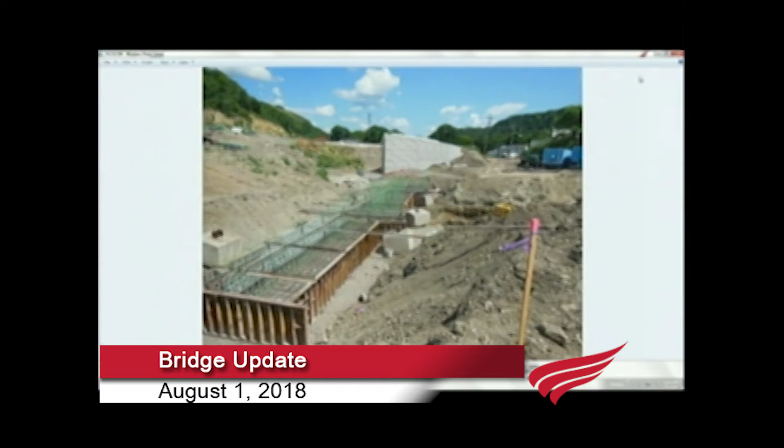So I believe this is the footing for one of the retaining walls. Looks like we're down there somewhere near the Red Wing Shoe plant. I'm a little unfamiliar with the site yet. I'm trying. Some of these don't look real familiar to me. This isn't in Winona, is it? No, or Dresbach.

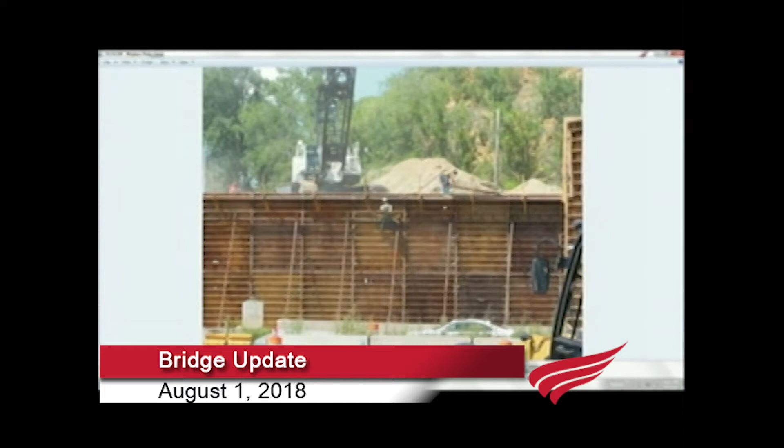And I believe this is the south abutment of the bridge over Highway 61. They're getting that set so they can get the rebar cage put in there and get that poured here shortly. This work is exactly the reason why 61 is one lane through there, because we're working this bridge right now. So it's going to be extended for a while, correct, Mark? That it's going to be one lane in each direction? Right, I believe so, yeah.

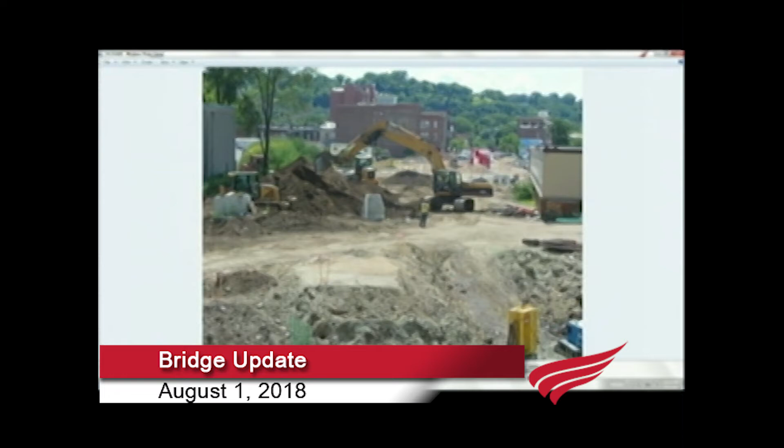And this is some storm sewer work. I believe this is 3rd Street, right, Jay? Correct. Yep. Okay, I believe they're doing some storm sewer in there. We brought up the temp water right there for the fire protection. Yep, right where your cursor is. Okay, right in here. Into Red Wing Shoe, yeah. That got turned on this morning, so we're ready to really hit the utility work again.

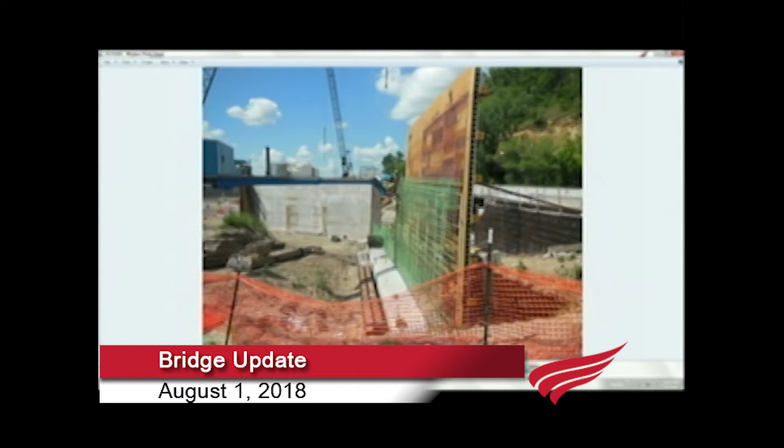And I believe this must be a retaining wall adjacent to the south abutment over 61, because there's the temporary bridge over here. So I believe they're pouring this retaining wall right now. That's for the retaining wall for the rest of the button hook to be finished off. Okay.

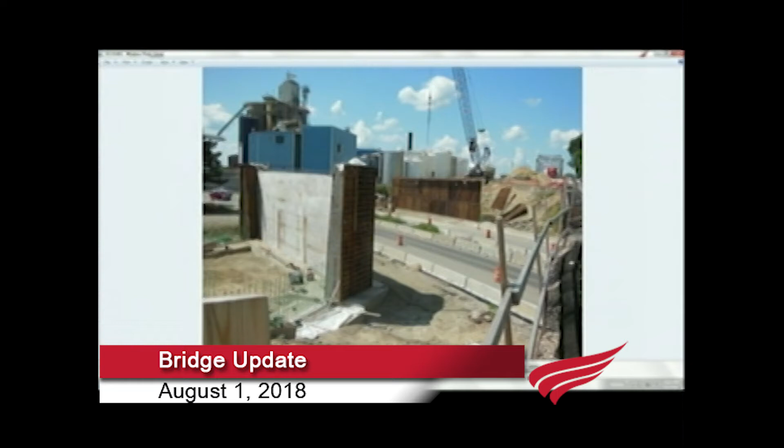And kind of another picture of the same area, more of a total picture. Interesting to note, those abutments are completely on spread footings, correct, Mark? Yep. There's no pile driven on the site. Very unusual. Most bridges are built on piling, but I believe there's a lot of rock in this area. A lot of rock, and of course, we didn't want the vibrations with Barn Bluff and the historic buildings in the area. Yeah, yep.

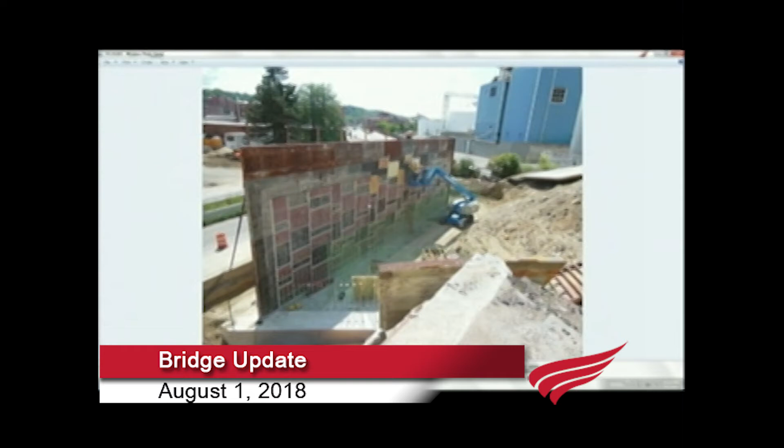And this would be the backside showing the north abutment of the 61 bridge. And you can see the form liners they put in to give the abutment some detail, so it's not just plain concrete.

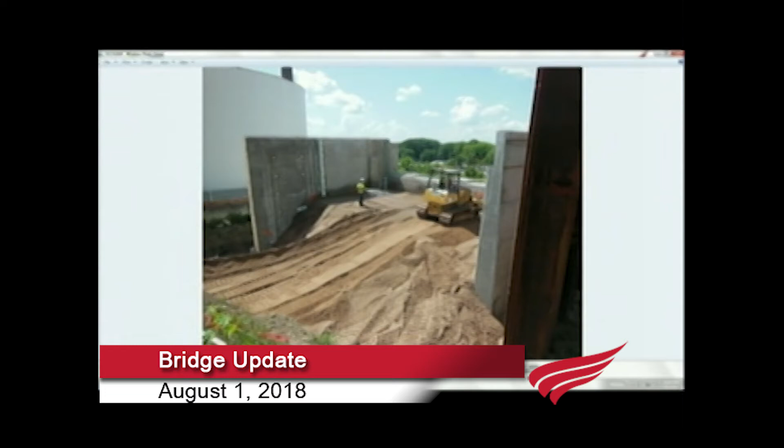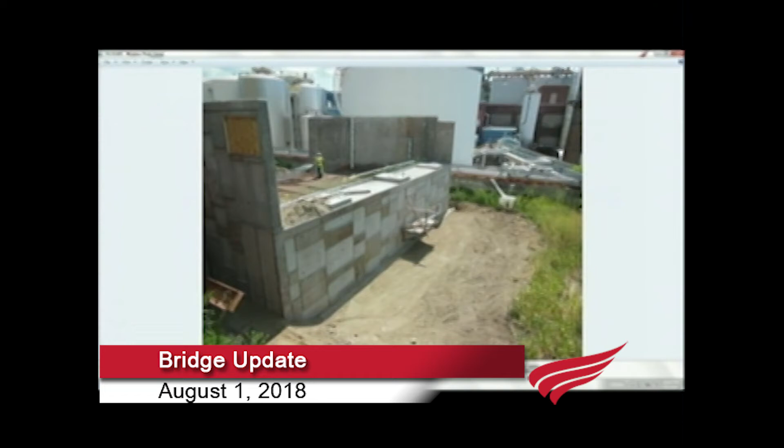Again, kind of the same picture, just from a different view. It must be up on the bridge here. That would be the Minnesota abutment for the main crossing. Yep. I think, Patty, you went down there. We're in that area a while back, you were standing down there. I think I saw a picture of you guys on that tour. Yes. That's awesome.

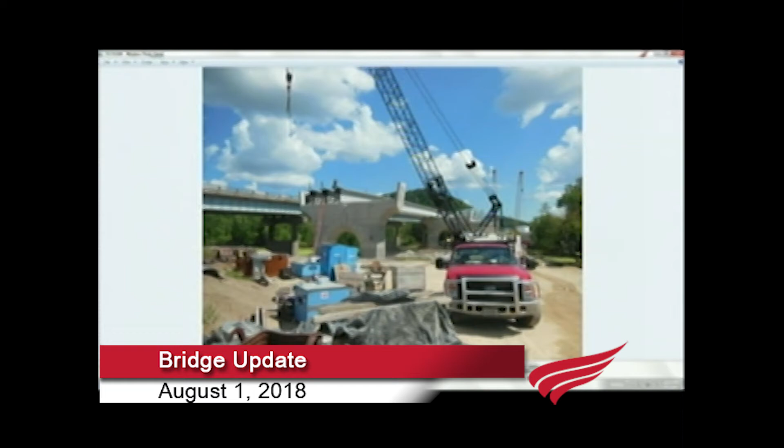Then there's some of the beams in Wisconsin. So far, I believe they've set 3 beams in each of the first 3 spans. So getting those set, and as I said before, they're getting the decking put in place for a concrete pour. So that decking follows up fairly close to getting the beams set, huh? Yep. Good. Another picture, kind of the same area, just looking a little more towards the north.

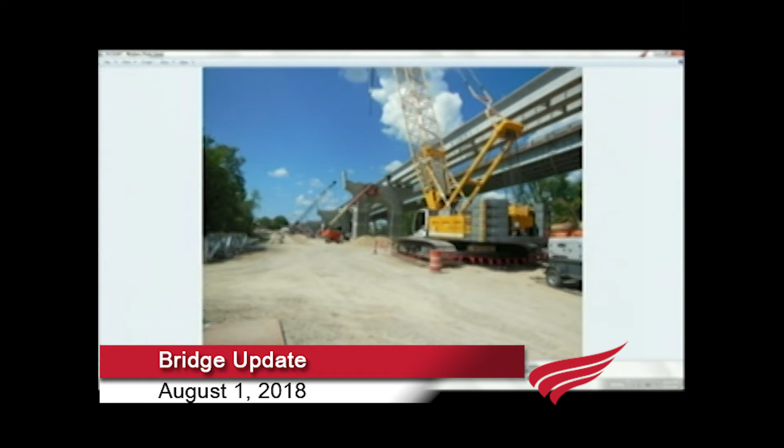Mark, where are those beams coming from again? I believe they're made by County Materials, and they're coming out of Janesville, Wisconsin. Janesville, Wisconsin, okay. And there's a picture from the barge. That's the drill rig. You can see the auger for drilling into the rock. And there's 4 of those, is that correct? There's 4 drilled 9-foot shafts. 4 drilled shafts on Pier 2.

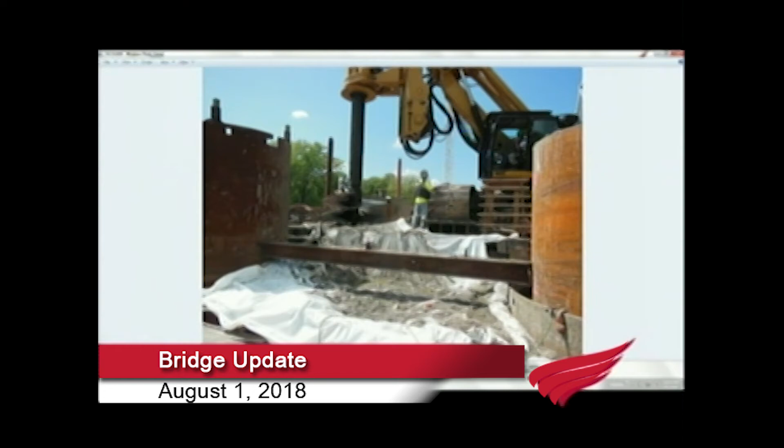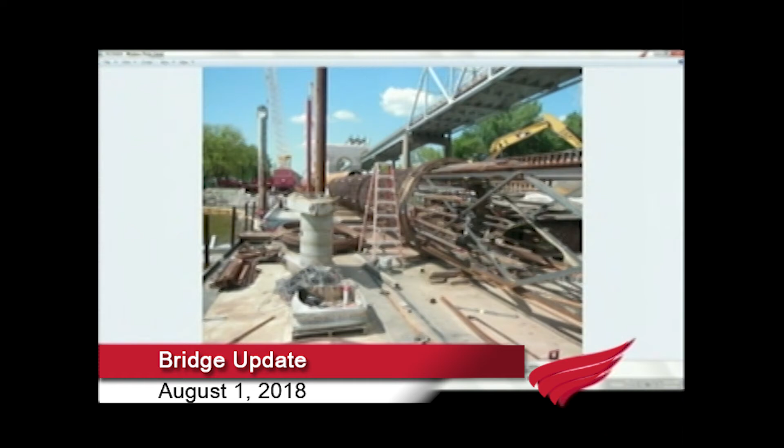And there's a picture from the barge. That is the rebar cage that goes down into that drilled shaft. And a beam as it's being lifted to be put in place. I believe I've been told these are the longest pre-stressed beams that MnDOT has used. They're, I believe, 170 feet long, and they're 82 inches from top to bottom in depth.

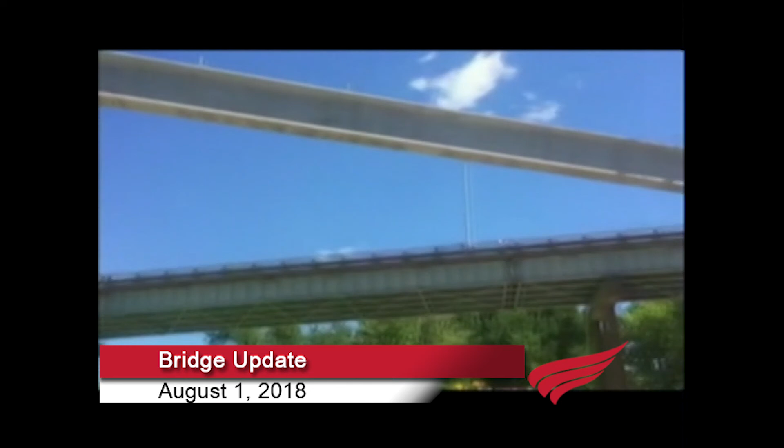So Mark, are all the piers on the Wisconsin side ready for beams to be placed on? Are they all cured out and ready? Yes. Okay. Yep, they are. Kind of the same picture as the iron workers are getting ready to set the beam on the bearings.

And then I know there's some interest in the size of the vehicles, or the vehicle that actually brings the beam to the site. Yeah. You can see how long it is. So that's all the pictures I brought.

Okay. How about any other questions about anything that's happened this past month or what's coming up? I got a bit of a question, I guess, wondering where we are schedule-wise now that we're able to work back in the river again. I know there was talk we were getting real worried about getting the piers ready so we could get the main span put in place over the winter. What's the schedule looking like overall for the bridge project now?